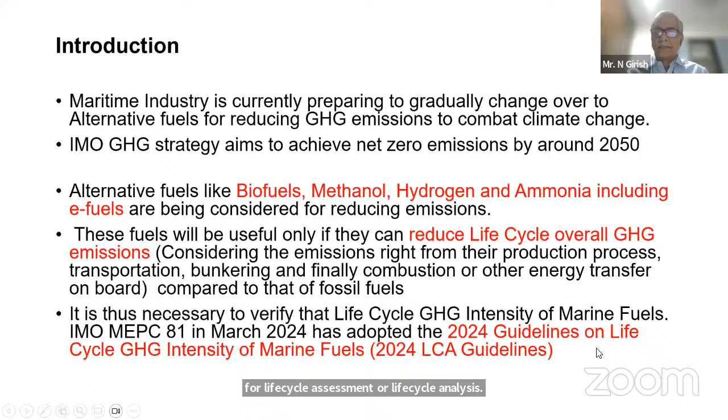So we will briefly see what is in these guidelines. Now this is what we have been talking about. We have the life cycle concept here.

So the extraction and processing takes place first, either offshore or onshore, and while doing this extraction and processing, some greenhouse gases and pollutants are emitted in the process. Then it is transported, either by pipelines, then trucks and ships, and during transportation fuel is consumed, and again some GHG emission comes out from that fuel.

Then it reaches a conversion site like a refinery where the crude oil is refined. At that time, a lot of energy and chemicals are required for this process, so again, due to this energy, some GHG emissions come out. This may include carbon capture, which may help in reducing this slightly, because we absorb the carbon dioxide and stop it from going into the atmosphere. That we will see later.

Then we have the transportation and distribution of the fuel from the refinery to wherever sources it is, it can be on the ship also. Finally, it reaches the end user, and the end user also will have GHG emissions during combustion or usage of the fuel. So each of the steps will have GHG emissions, so life cycle emissions will include the entire cycle.

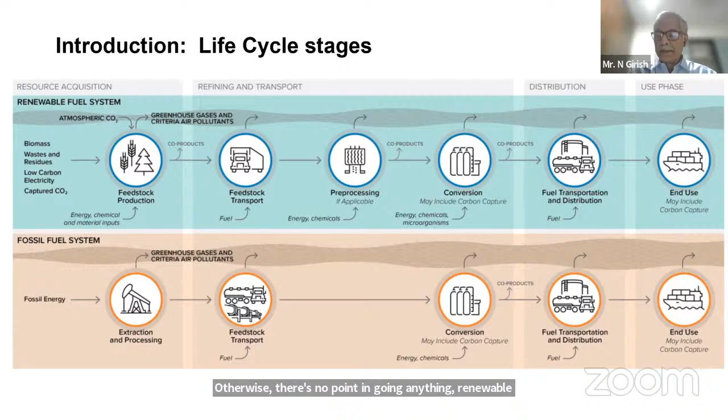So we have feedstock extraction, cultivation, early processing of the feedstock, transportation, conversion to product fuel, and the product fuel is transported, stored or delivered, retailed. Each of these processes will have some emissions. Finally, bunkering takes place onto the ship, and it is combustion or conversion in the ship - energy is converted through an energy converter, which can be an engine, fuel cell, or whatever means of conversion. That's where tank to wake takes place. So until and including bunkering is well to tank. We'll be using these words well to tank and tank to wake very often, normally known as WTT and TTW.

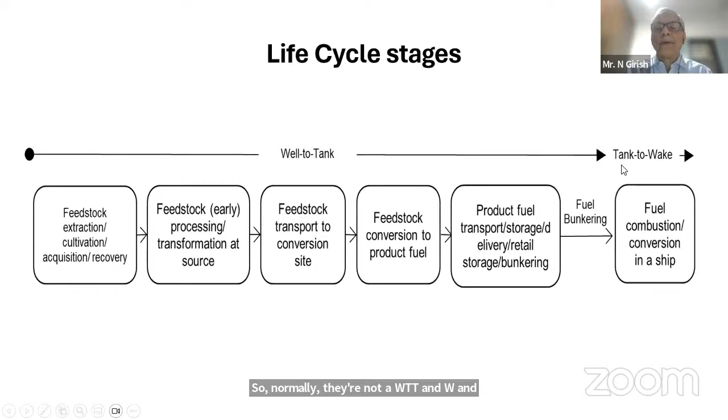Earlier we have been talking only about carbon dioxide, trying to control carbon dioxide emissions, but now it is realized that as we go for other fuels, we have to consider other greenhouse gases also. So in these guidelines, we mainly consider carbon dioxide, methane, and nitrous oxide. Why methane and nitrous oxide? Because they have higher global warming potential compared to carbon dioxide.

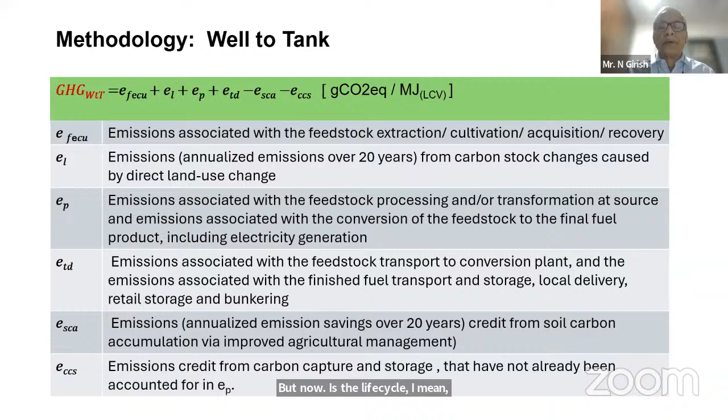Now, we talked about the land use change, a little bit, so that you get a better understanding. The land use change can be two types, direct and indirect. For the production of biofuels, mainly due to land use change, LUC can be classified as DLUC and indirect LUC, that is ILUC. So DLUC and ILUC are very commonly used words in this area.

DLUC is described as a change in the use or management of land within the product system being assessed. That means we are using some land for cultivating a crop, from which we directly process and get the biofuel, let us say corn or any other product, or palm oil or whatever you are cultivating. And when the land is used for that purpose, there is a direct land use change.

And the direct land use impacts comprise the emissions and sequestration resulting from carbon stock changes in biomass, dead organic matter, and soil organic matter. So if any of these changes in the soil, like biomass or organic matter or soil organic matter, that will change the carbon stock. And there is a direct land use change effect on the emissions.

ILUC is an indirect land use change, but it's a consequence of the direct land use change, which occurs outside the product system being assessed. I mean, supposing we use some area which is already used for some feedstock cultivation, like corn or palm oil, which is used for a food crop. Let's say it's a food crop, and suddenly we change that for the purpose of biofuel production. So there will be an effect on the price of the food crop or food because of this. So this is the indirect effect.

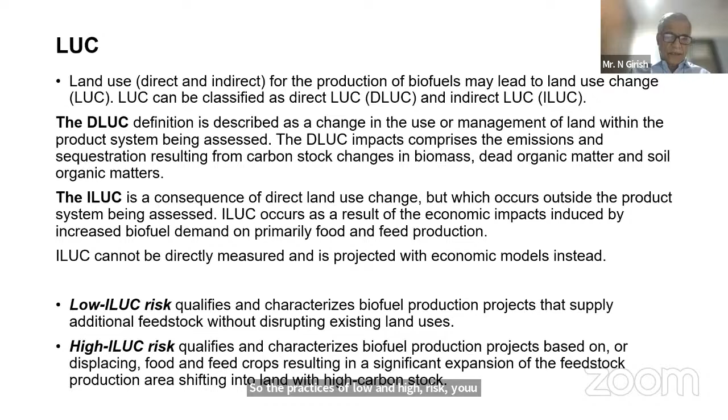So this part will give you what is happening in the combustion and what is coming out, creating a global warming potential. Now there are other things also which are happening.

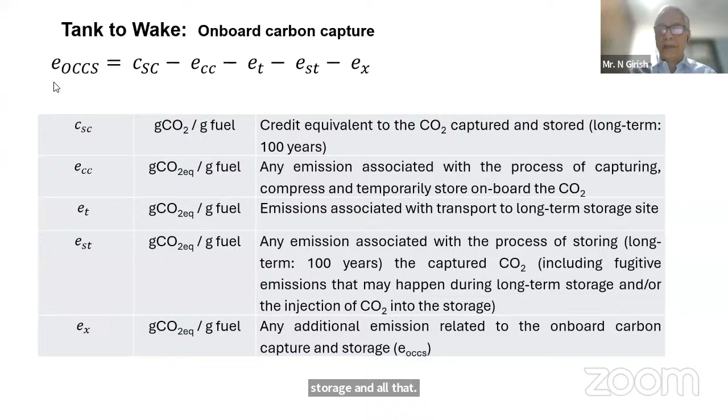That means the total credit given, you have to minus all the other factors, and the emission due to the process of capturing and the transportation and storage and all that. So this is EOCCS - just to understand, because we are using it, you would have seen in the previous slide that we have used this EOCCS, taken out of this total GHG emission from tank to wake.

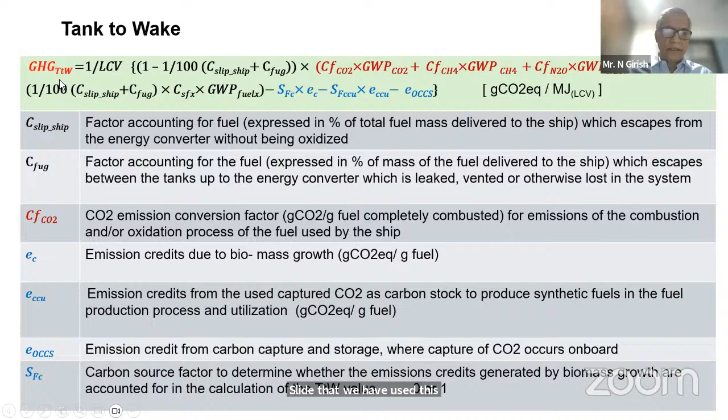Now we come to a different topic. So far we have seen the GHG emissions, how to work out the GHG emissions, tank to wake and well to wake - well to tank and tank to wake. Now summation of well to tank and tank to wake will be the well to wake. That's what we are interested in, the total life cycle emission.

Now there are other aspects also we have to consider when you produce such fuels - sustainability. So we have to think about the sustainability of these fuels. Otherwise, we cannot be producing some fuel which is not sustainable. There are a lot of aspects defined in the guidelines to be considered, and the fuel should be certified to comply with these aspects - it's not exactly a strict criteria, but some type of criteria it meets. That's what the guidelines give.

So firstly, it is greenhouse gases. We have already seen that the greenhouse gases should not be more than the fossil fuel. Sustainable marine fuel should generate lower GHG emissions than conventional marine fuels. So that has to be checked.

Energy-based weighted average of liquid petroleum products on 3 specific years of DCS data - that's the purpose of IMO DCS. They take 3 years of data, and from that we can find the energy weighted average of petroleum products, how much is being consumed now, or how much is being emitted now.

The sustainable marine fuel should emit less than the current fossil fuels on a life cycle basis. That is the first one, which we can work out from what we have done so far.

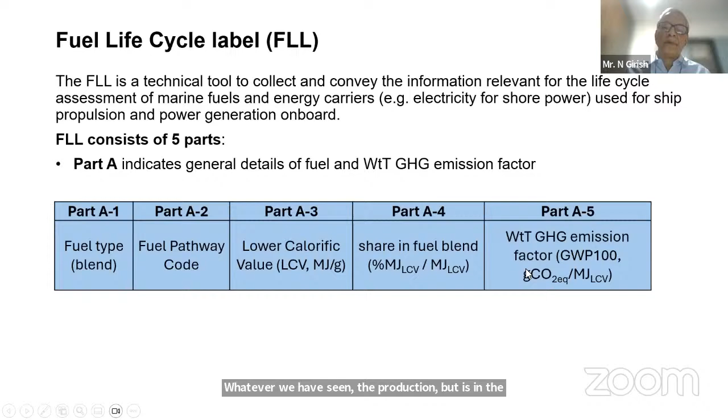Pathway code is given in these guidelines, along with lower calorific value and share in the fuel blend, in case there's a blend. Part A5 is an important point, the well to tank GHG emission factor, given as grams CO2 equivalent per MJ. So here, well to tank value is given, that means in part A, we get the well to tank value covering production, transportation and distribution. All that well to tank emission factor will be given in part A of the label.

Then the second label is part B, which indicates carbon credits related to carbon sources. We talked about carbon credits quite a bit. Emission credits, part B1 and B2, relate to biogenic carbon sources, which we called EC. If there's a credit, you get it for using certain biofuels or biomass for producing the fuel. That is the EC value. Then there's carbon credit due to CCU, that is captured carbon dioxide captured during the production process. These two values are given in part B1 and B2. These are the credits which will be used later when we subtract them from the tank to wake emissions.

Then we have part C, which is basically the tank to wake emission, GHG emissions, and the energy converter is also specified for a particular energy converter type, for a particular engine type. As we discussed earlier, the tank to wake GHG emissions are given in two types. The first one is without considering the carbon source, meaning we calculate without giving any credit for the carbon source, just the tank to wake emissions.

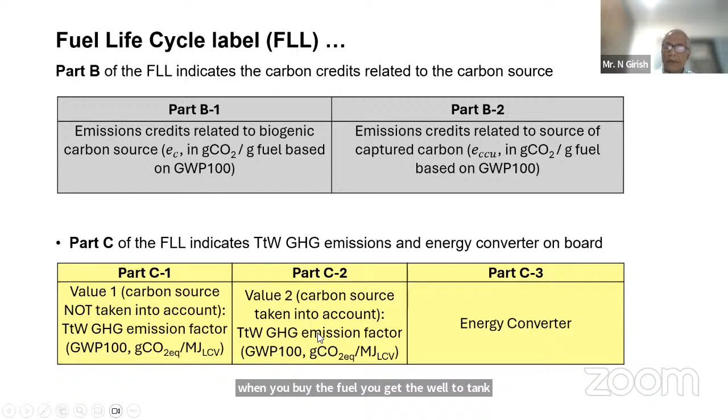Different parts are used by different parties - fuel supplier, owner, operator, administration, RO, etc. The fuel supplier may look only at well to tank, that's part A, whereas the owner operator may look at the entire thing. Administration and RO will look at the whole thing, and the owner will focus more on tank to wake, because when you buy the fuel you already get the well to tank value. So the owner focuses on tank to wake emissions, and finally the combined thing will be seen and then certified. So different parts of the FLL along the fuel pathway are relevant to different parties' activities.

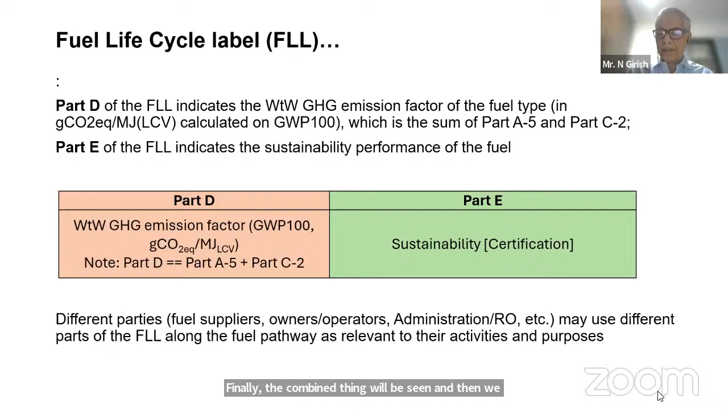So that is about the fuel life cycle label, which is a tool for indicating the life cycle emission of the fuel. Now coming to default emission factors - we've talked about all these calculations and values, but unless we have data on how much GHG emissions took place during production of the fuel, or what happens during fugitive emissions, or what happens on board, without that you won't be able to calculate the overall well to wake emissions.

So some default emission factors have been collected, and the guideline gives guidance on how to collect these principles and procedures for evaluation of default emission factors. They generally use representative and conservative assumptions, which encompass variable performance of feedstock fuel pathways across world regions and states. So presently the guideline gives you worldwide performance and then takes the most conservative value.

There are different opinions on this. Sometimes a regional value may be better, lower, giving lower emissions than the global value. So there is still discussion going on at IMO on this matter, but presently they consider the conservative value. To establish a well-to-tank default emission factor, at least 3 reference values from 3 different sources should be considered, and among the 3, the upper emission value should be selected as default. So the uppermost value will be taken as the default value. That's a conservative approach.

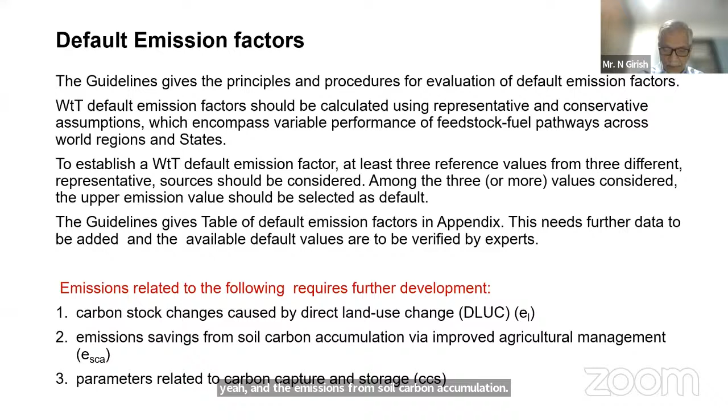Guidelines give a table of default emission factors in the appendix. There is a big table given in the guidelines, however this table is currently insufficient - they don't have sufficient data because data is still being collected and must be verified by experts before being put into the guidelines. So emissions related to the following require further development: carbon stock changes, dLUC, eLUC, emissions from soil carbon accumulation (eSCA), and parameters related to carbon capture and storage. All these require further study and further development of the guidelines.

Recently the guidelines were modified slightly by adopting IPCC and ISO 14067 based methodology for the evaluation of eSCA and eLUC - soil carbon accumulation and land use change. Whereas the carbon factor for methane, nitrous oxide, and C-slip emission factors depend on the type of fuel, engine, and engine load, which also varies and must be considered. For existing fuels and existing engines, these factors can be obtained using reference values given in the 4th IMO GHG study, but for other fuels and engines, further work needs to establish measurement procedures.

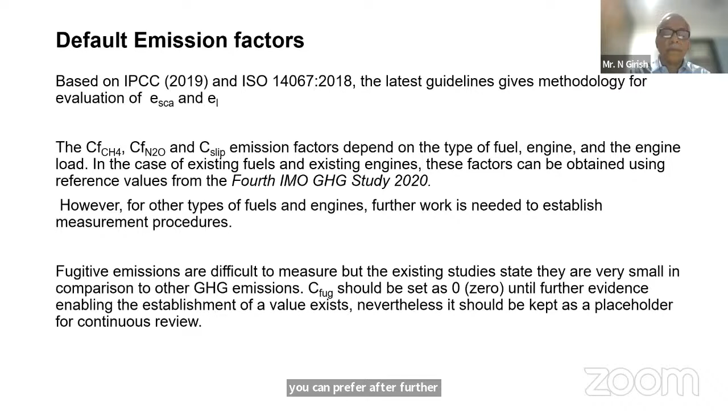So these are all areas still not completely covered by these guidelines - not properly covered, further work is required. Another area is fugitive emissions, which are difficult to measure. Fugitive emissions are what happens from the tank to the energy converter - emissions and leakages from pipelines and so on. For example, LNG gas carriers have some assumptions on fugitive emissions, but they are very small compared to other GHG emissions. C fugitive, for the time being, is set to 0, but after further review and study of various data, C fugitive values will also be given, in the order of maybe 1 to 3%.

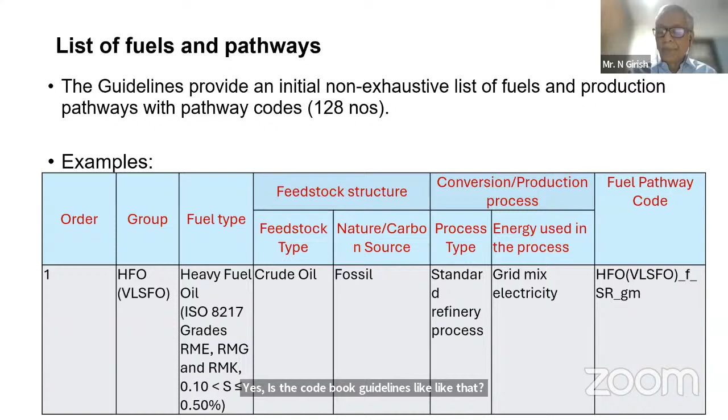One or two more examples. If you take LNG fuel, methane, natural gas from fossil, standard LNG production including liquefaction, and grid mix electricity is being used - this is the code for that.

If you take a biofuel, for example FAME, fatty acid methyl ester, which is normally used as biofuel diesel FAME, it is taken from the second generation feedstock, not the first generation - meaning maybe used oil being used again, so your carbon emissions will come down. Biogenic and transesterification is the process, and grid mix electricity is used. So this is the code: FAME, biogenic, transesterification, second generation, and grid mix electricity.

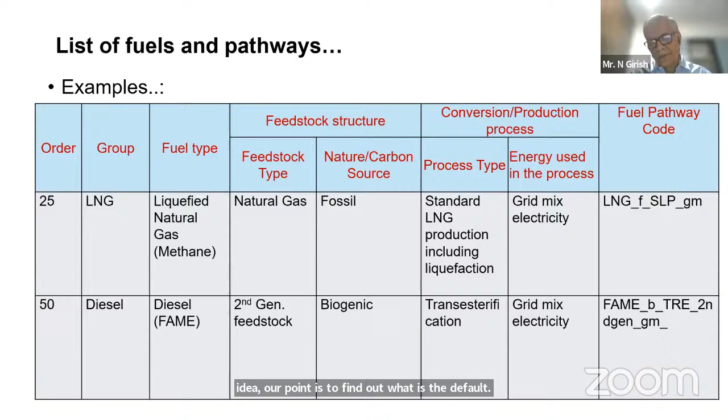So like that, about 128 codes are given. Now our point is to find out what is the default emission value for each of these codes. That's a very big job with IMO. They have not completed it, but whatever data they have got, they have collected. Some of the data which they are sure about, they could verify for their code, but it's not fully verified. Only the verified data published in the fourth IMO GHG study is put here.

For example, if you take the first one we talked about earlier, heavy fuel oil - the well-to-tank GHG intensity is 16.8 grams CO2 per megajoule. This is only the well-to-tank. The tank-to-wake, even though it's not given here, we can calculate because we have the LCV value. So when you burn that fuel, it comes to around a certain value, and the CF CO2 is also given here. CF CO2 gives you the grams of carbon dioxide coming out from 1 gram of fuel.

So if 3.114 grams is coming out of 1 gram of fuel, if you divide it by the LCV, you will get so much carbon dioxide per megajoule. That is what we are looking at - per megajoule. That is the GHG intensity, grams CO2 per megajoule. So this divided by this will give you that.

So if you calculate that way, it works out to around 90. The total is around 76 plus, coming to around 90, maybe 92 or something. That will be the well-to-wake value, the total well-to-wake value for HFO. Then N2O and methane - some very little amount of methane and nitrous oxide is also emitted when you burn this fuel, when there is combustion. That is also identified here.

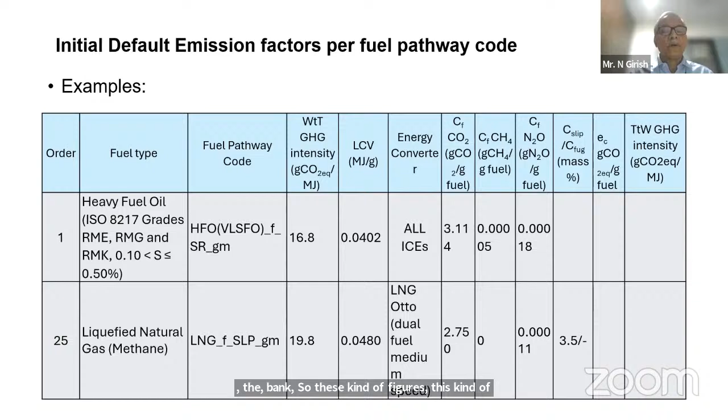So these kinds of tables give you an entire spectrum of various default values for various types of fuels and pathways. Another thing - for diesel FAME, they have given only the well-to-tank value and LCV value, because we are not considering other emissions here, since this is a second generation fuel. We don't consider what is happening in carbon dioxide emission, because credit is given by the biomass growth - since it's taken from biomass, we don't count CO2 here.

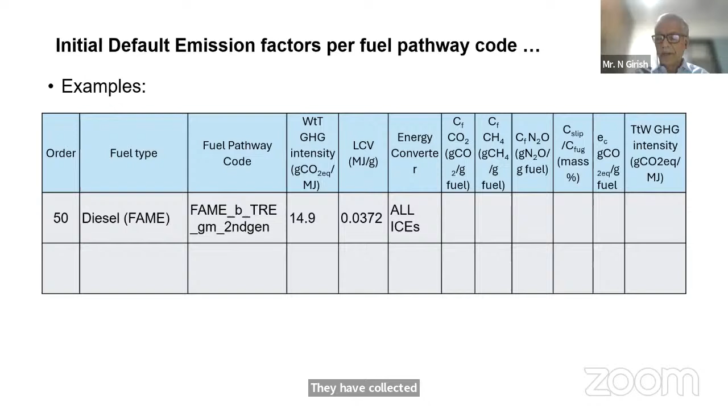So that is briefly how it looks in the guidelines, the default emission factors. A lot of work is yet to be done on default emission factors. Whatever they could collect in the last one year, they have collected through the correspondence group, but they still could not verify it, and they needed experts to verify it before it is finally put into the guidelines.

Now, these are the default emission factors. You can also allow actual emission factors if you find that the default values are higher than the real actual value. If you can prove that, it is possible to accept actual emission factors. For that, you have to use the same guidelines and calculate as per the methodology given in the guidelines.

So well to tank and tank to wake emission factors will be based on the methodologies established in the guidelines. There is one difference: in the case of fossil fuels, the default values are already given and they don't allow actual values, because presently the guidelines do not allow actual values for fossil fuel. Some kind of conservative average value has been put here, and since this is an established value, they're not allowing any actual emission factor. But this has been contested.

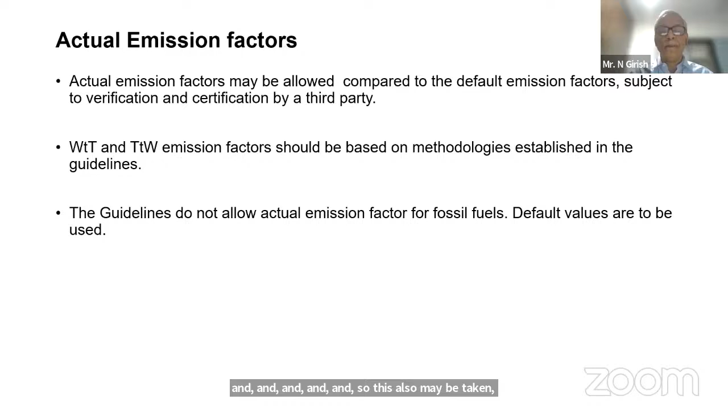There have been some papers in the last MEPC saying that we should allow actual factor values. So this also may be discussed further. As of now, default values are only allowed for the fossil fuel.

Now we come to another aspect, verification and certification. We have already seen that the FLL, the fuel life cycle label, gives you the GHG emission at each stage of the pathway of the fuel. This has to be verified and certified by somebody - that is very important, otherwise we can't use these values. So when used as evidence for performance, the fuel's FLL needs to be verified and certified by a third party, taking into account further guidance to be developed.

So this verification and certification, the following parts of FLL may be carried out separately by different verification bodies. You may have different bodies for different parts of the pathway, like Part A, well to tank emission, the production process, done by one party. Part B, carbon credit, can be done by another party. Part C is tank to wake, done by a different party dealing with the ship. And Part E, sustainability certification, can also be done by a different party.

The same third party can do the entire thing also, but normally it doesn't happen, because each party will have their expertise in various fields. So verification of Part D is to be based on verified Part A, Part B, and Part C.

Part D, the well to wake emissions, will be verified based on what we have got from well to tank and tank to wake, as well as the carbon credits. These three together will only determine how much well to wake emissions there is. So unless Part A, Part B, and Part C are available, we can't verify Part D.

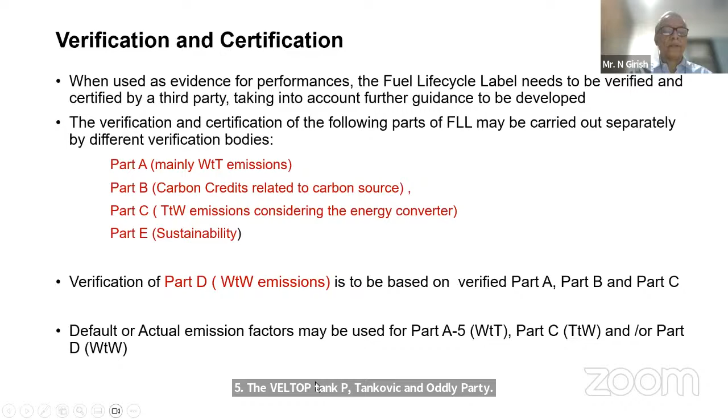Now, the certification schemes and standards should also be recognized by the committee - the MEPC, IMO should recognize the scheme. Only such schemes will be accepted. Guidance will be developed by IMO for certification - that's another remaining job to be done. And the list of recognized certification scheme standards should be publicly available and kept under review.

And the framework, criteria, and procedures leading to the recognition of certification schemes should be implemented uniformly - that is why it has to be recognized by IMO. There are many certification bodies already operating in various other sectors, also in the marine sector. So this gives a list of various frameworks already available or in place, some of which can be adopted by IMO also.

There are some mandatory requirements, governmental statutory requirements in EU, California, and Brazil, like EU RED, Renewable Energy Directive, mainly used for biofuels, and FuelEU Maritime, which you know about - they are trying to reduce the GHG intensity of marine fuels. And there are some voluntary schemes also, like ICAO CORSIA, used by the airline industry and accepted by ICAO. Aviation uses this because they use aviation fuel, which is mainly biofuels.

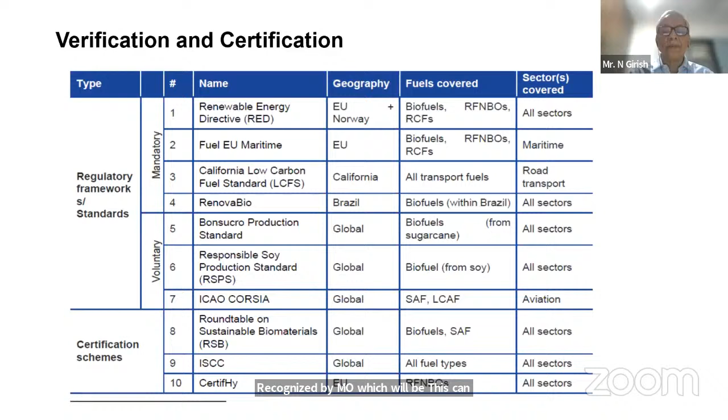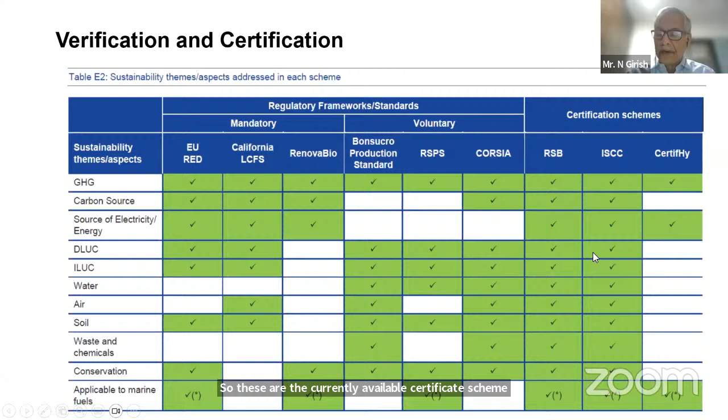Whereas if you look at the RSB and ISCC certification schemes, they cover all these aspects which are covered in the IMO guidelines. So these are more suitable for the purpose of IMO now, and these are all applicable to marine fuels, partly at least - some of the fuels are covered here. So these are the currently available certification schemes which IMO can possibly accept and recognize, and accordingly certification can be done for the fuels.

Now this LCA guideline will need a review. The guidelines also talk about how to review this. They should be kept under continuous technical review, taking into account emerging and evolving technologies, particularly the well-to-tank, tank-to-wake, and well-to-wake default emission factors, because the default value can change with new technology. Today's default value for a synthetic fuel may, tomorrow, with better processes and improvements, change and reduce.

And the new proposed fuel pathways and the corresponding default emission factors, in addition to those specified in the appendix - the appendix already gives a complete full list, we talked about 108 pathways. There could be new pathways coming up that will also have to be added. That's why these guidelines are to be kept under review.

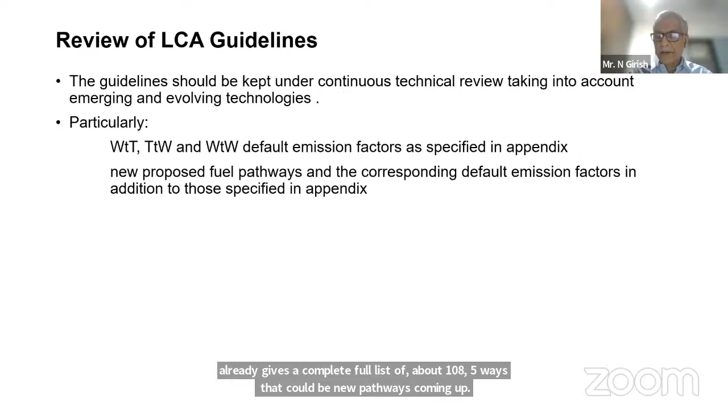Now, the work on this guideline is not complete. IMO has realized that, even though MEPC has already adopted the 2024 guidelines, there is much more work to be done. So they have formed some correspondence groups and also an expert group. The first correspondence group will be on measurement and verification of non-CO2 GHG emissions, that is methane and nitrous oxide emissions, and also onboard carbon capture.

This correspondence group will work on developing a framework for actual tank-to-wake methane and nitrous oxide emission factors, how to measure and verify, as well as the C-slip value for energy converters. C-slip is very important - how much methane slip is taking place in the engines.

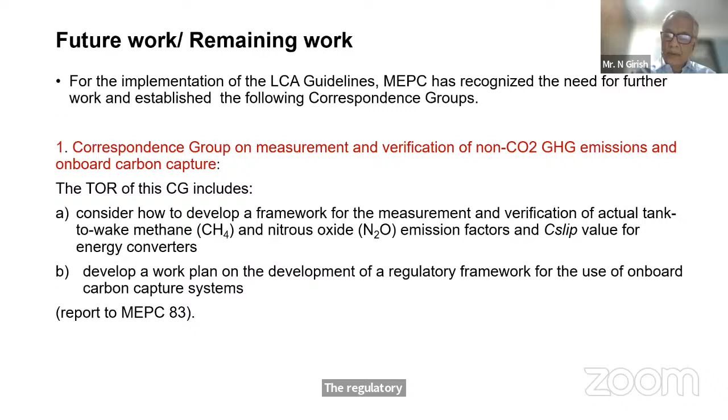There will also be a work plan on development of a regulatory framework for the use of onboard carbon capture. Carbon capture is picking up because there are carbon capture systems available, even though they consume a lot of energy. Still, a regulatory framework is needed for approval of those carbon capture systems, and that will also be done by this correspondence group.

Another correspondence group is being formed for development of the LCA framework, to further consider other social and economic sustainability themes and aspects of marine fuels. We talked about mainly environmental considerations only in the case of sustainability, but there can be other social and economic aspects also - how much to consider will be discussed by this correspondence group.

Then the third one is the expert group. There is a system called GESAMP, available in the UN. IMO uses GESAMP, which means a group of experts on the scientific aspects of marine environmental protection. A new working group, the GESAMP LCA working group, will be formed - that's what they're trying to form.

This working group will evaluate - they are a group of experts who know the scientific aspects of all the fuels, and they will do a scientific review of the LCA methodology and the default emission factors. Nobody has verified it properly, so they will verify these default emission factors and improve the sustainability aspects and metrics, land use change classification, as well as provide information on development of fuel pathway and emission certification methodology. Certification methodology will also be seen by this GESAMP LCA working group to be established.

So these are the future works to be done. We have the guidelines and further work is still required. So we have broadly seen what is in the guidelines and how they calculate the well-to-tank and tank-to-wake emissions and sustainability, as well as the fuel life cycle label to indicate and how we have to verify and certify that.